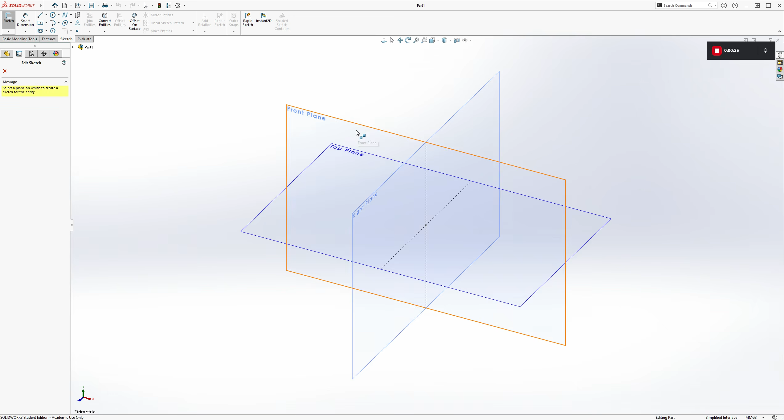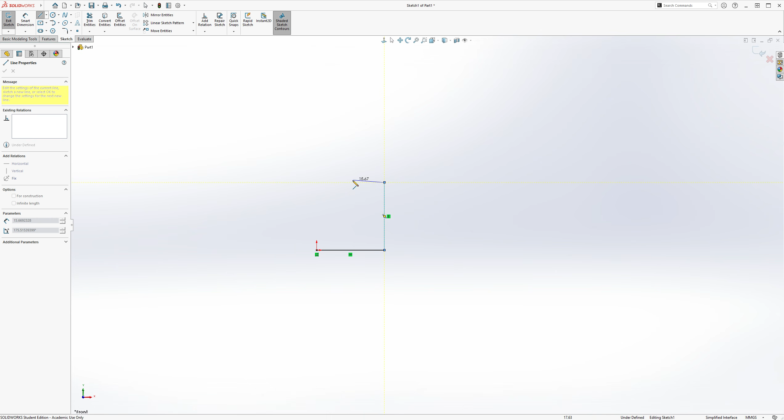So the overall diameter of the entire part is going to be 50. I'm just going to draw a horizontal line stretching across like this, and draw a line up like this. First we'll start with this as our overall extrude, and then I'll create some more rectangles in here to make the revolve cut.

First let's make sure the overall diameter is correct, oh actually I forgot the most important thing, which is the axis of revolution. Here's your center line, right here.

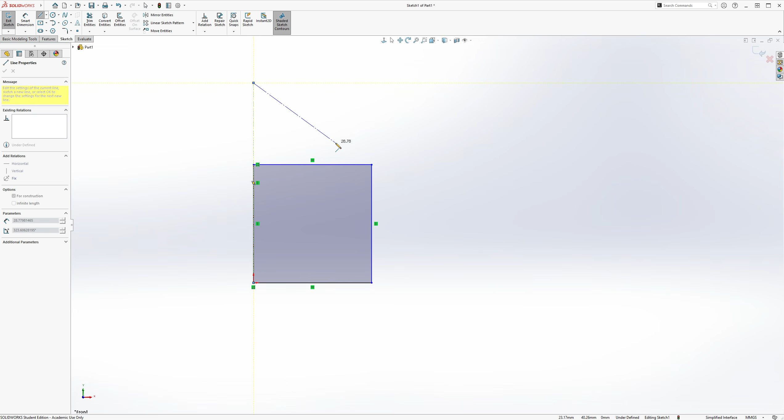Okay, so let's first establish the overall diameter. It's not 50, it's actually 55. The overall diameter is 55. So I'm going to click on the right side, click on the center line, hold and pull down. The whole total diameter is 55, so I will establish it as that.

And the height of this initial revolve, if you look in the front view, it's actually not 30, it's 24. The distance from those pizza slice cut extrusions at the top to the cylindrical extrusion is 6, and you get that from detail view B. So you subtract 6 from 30, and you're left with 24. So the cylindrical part is 24 tall, so that's what we're going to dimension this as.

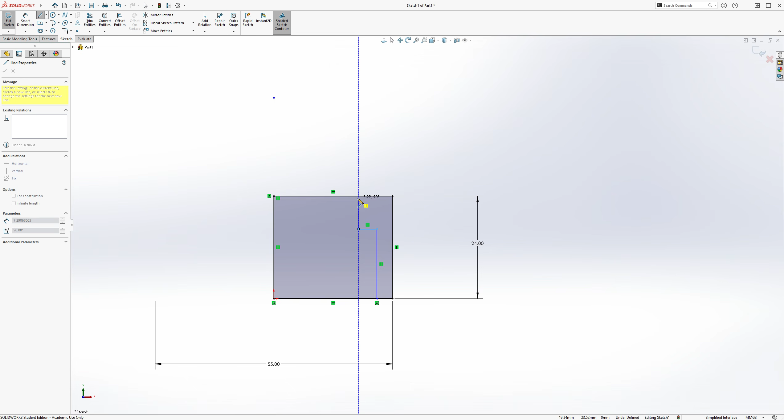So there's your base cylinder, but then we're going to add some cuts. I'm going to add a line here, go in a little bit, and go back up like this. So that's going to be your interior cuts.

The first cut layer has a diameter of 47. So I'm going to click on this line, click on the center line, hold, pull it down, and establish that cut diameter as 47. I'm going to do a similar thing with the other line.

The center hole's diameter is 30, and you get that from the top view, 30 in diameter. So I'm going to click on this line, hold the center line, pull down, and make sure that diameter is 30.

And then now I need to find the distance between them. Let me see. The distance between them... wait, actually that's weird. What is the distance between them? Would it be 6? No, it wouldn't. Oh, I see. Ah, I see. Okay.

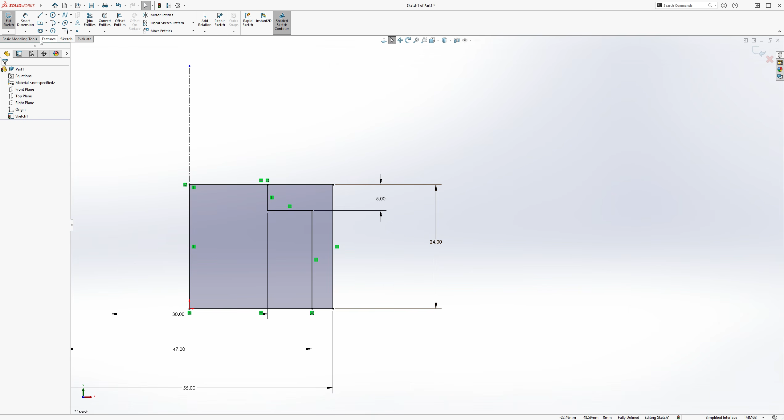From here we can do the revolve. So I'm going to click Feature, Revolve Boss Base, and the center line is already selected as the revolution axis. So I'm going to only select this contour, since this contour represents what's going to be revolve cut inside. So I'm going to select that.

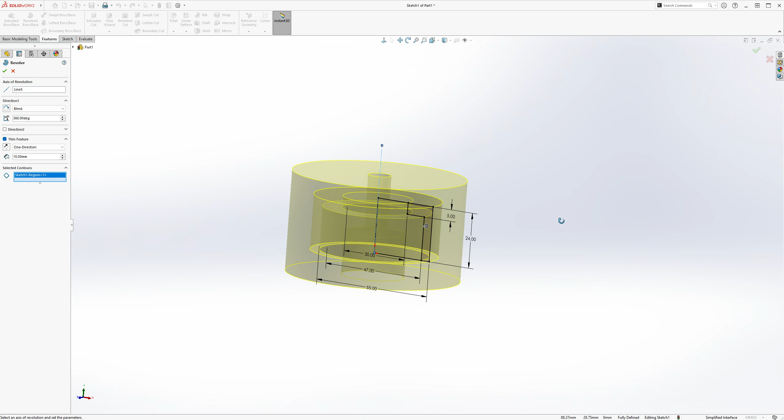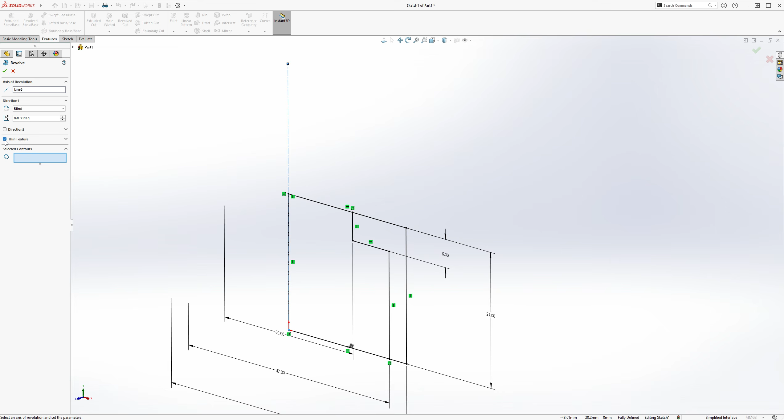Ooh, actually, wait, hold on. Wait, if I click Revolve Boss Base, wait, Thin Feature, why is Thin Feature turned on? I do not want Thin Feature turned on, I just want to revolve this. Yes, it should look like this. Yeah, it automatically set Thin Feature to be turned on for some reason, not sure why. But anyway, it should look like this. As you can see, it's hollow on the inside, two different layers, so that's good.

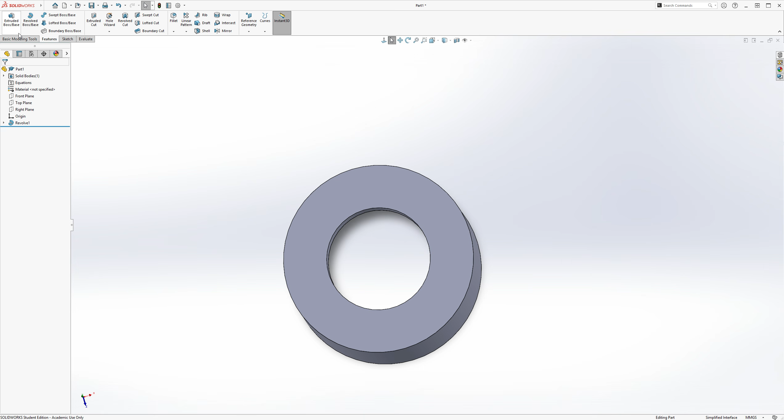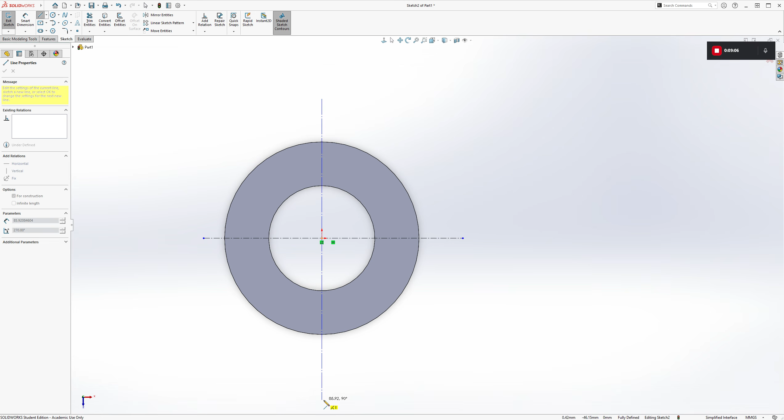Okay, so now we can go on to make our pizza slices. So let's click Sketch and let's click the top face. And then let's create a center line here. So actually, let's create 2 center lines, because I want the circles to be vertically constrained with the origin.

So I'm going to create a circle here, just a random circle. I'll actually create a concentric pair, like this. And then I'm going to mirror these 2 circles onto the other side, like so.

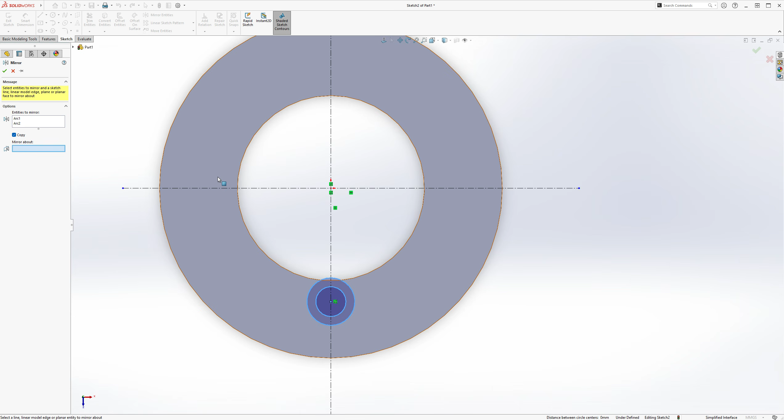Now the first constraint is that the distance between those 2 centers of these symmetric circles is going to be 37, so that's where we'll start. And we know that the diameter of the inner circle is going to be 5.

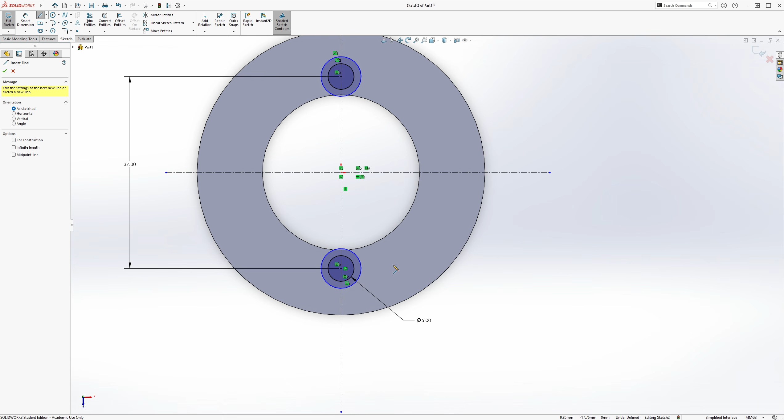Now let's add a line that's connected to the outer circle, coincident with the, I guess we'll just call it a donut, coincident with the donut extrusion. And then I'm going to mirror this line, this tangent line, onto the opposite side to get some symmetry.

And then I'm going to add an angle dimension between those two lines as being 100 degrees.

And then the last important detail is we need another tangent relation between this inner circle of the donut and this outer circle of the pizza cut. So I'm going to make these tangent. Tangent. And there, everything is fully defined.

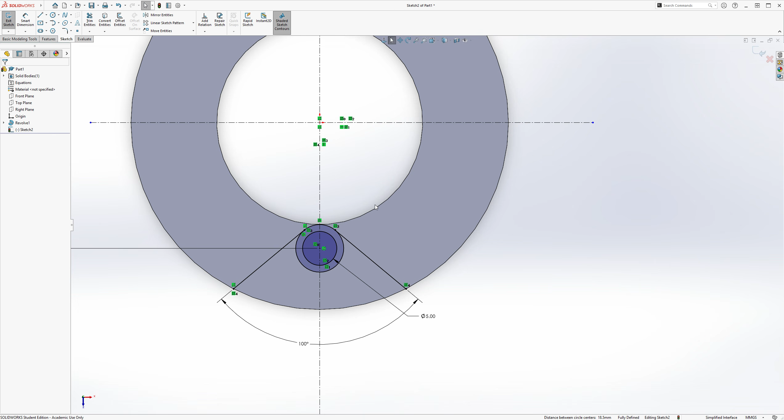Now all you need to do is just mirror these two tangent lines onto the other side. Mirror. So there's your pizza cuts. And you can just trim away the parts that you don't need.

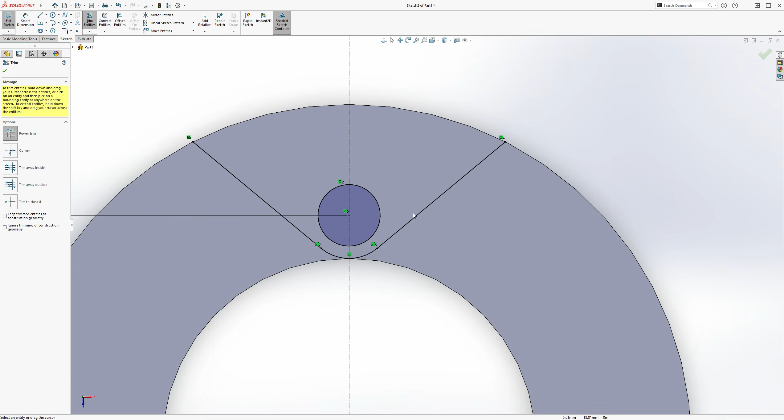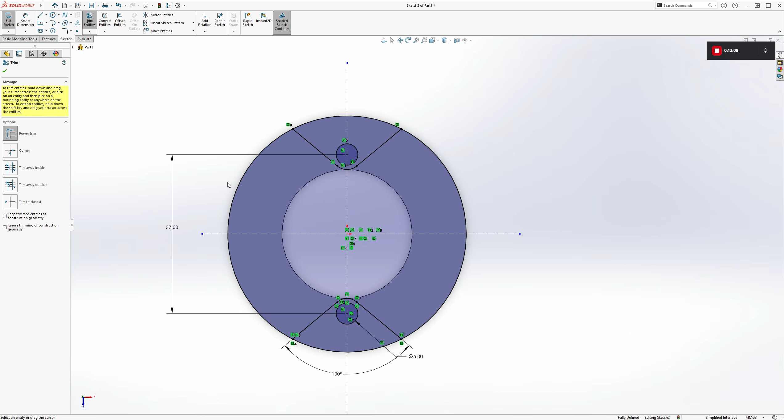But these are not closed contours because these edges aren't filled. So I'll have to use convert entities, and I'll just select the outer circle, convert that, and trim away the parts I don't need, like this. And boom, you have two closed contours and two pizza slices.

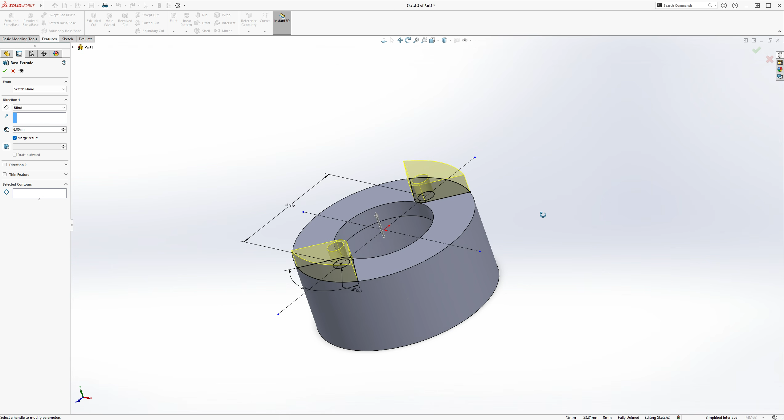So let's extrude those. Feature, Extrude Boss. They will be extruded upwards by 6. Upwards by 6. So select OK.

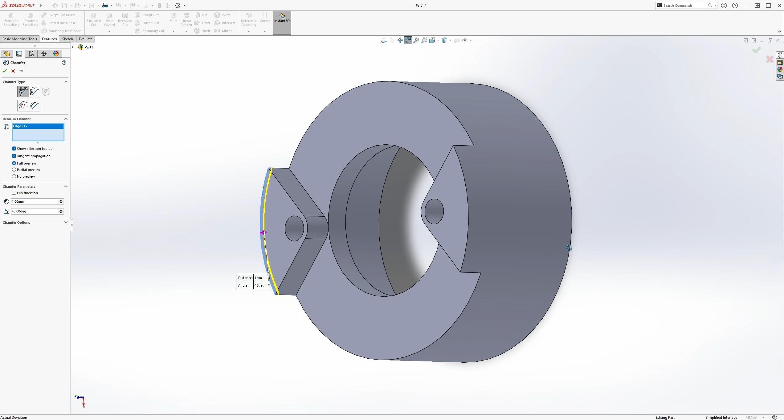Well, now then I believe there's chamfers, yes, there's chamfers on the sides, on the cross side of these pizza slices. So I'm gonna add those chamfers now, before I make this square cut on the side. And the chamfers are 1 millimeter and 45 degrees. So I'll select here, and same for the other side here. Select OK.

Okay, so time for the square cuts. I am going to start a sketch on top of one of the pizza slices. And I'm just going to draw a line connecting from, that connects both, that's coincident with the arc on both endpoints.

And I can move this line like this. So naturally, because we're on a circle, or on an arc, both points are going to be coincident with each other, and both points are going to be symmetric.

And the width dimension of this square cut is going to be 10, so I'll make this 10.

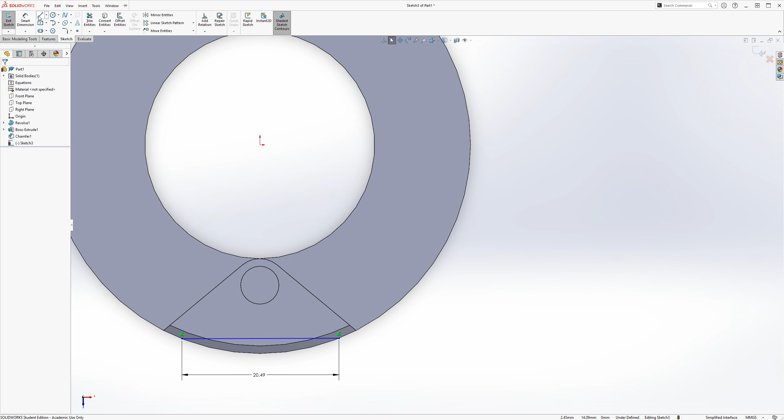Never mind, I guess the points are not symmetric, so let me make them symmetric. I'll take the vertical center line, control click the point, control click the center line, control click the other point, and make those symmetric. So now when I make this 10, it should be symmetric. Yes, okay, there we go.

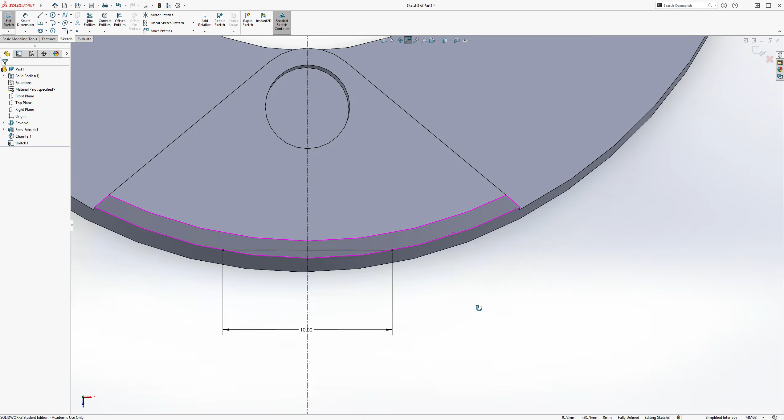And from here, we're going to proceed with the cuts. So I'm going to go to Features, Extrude Cut. Here, since we don't have a closed contour, you can actually use the Thin feature, which allows you to essentially extend this line a certain distance in this direction, and then extrude it a depth downwards.

I can keep it extruding in this side direction as 10, and then I can keep it cutting downwards. It will only cut downwards a depth of 12, so I'm going to click 12. See how it changes the downward depth cut.

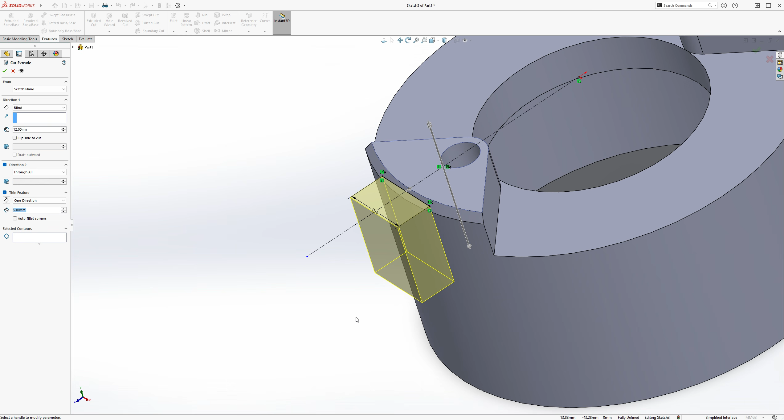But then if I were to change the square, if I were to change it to like 5, for example, it would make it a little thinner. It's basically just moving this line that I've created here, and dragging it across the side like this, and it's finishing the rectangle. By the way, it's the same, so I'm going to click OK. There's your square cuts right there.

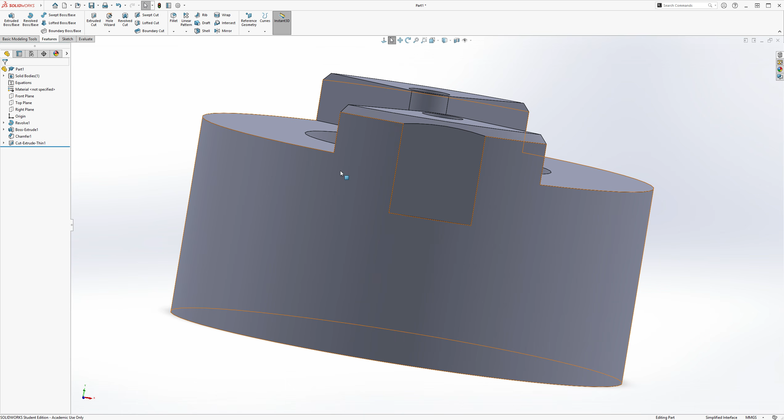And then I'm going to... there's supposed to be a circle here. Let's see. From what I'm seeing, the circle... oh no, there actually is a specific dimension. Oh, I see, hold on.

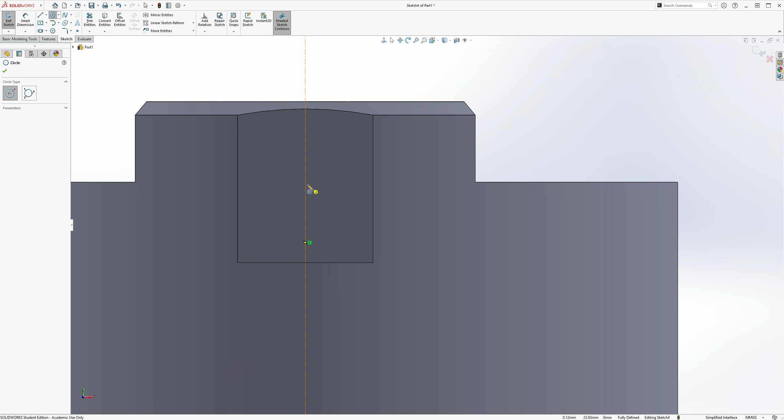I'm going to click a sketch, on the square. Let's get our center line, make it vertical like this. Let's get a circle, and make sure its diameter is 4.

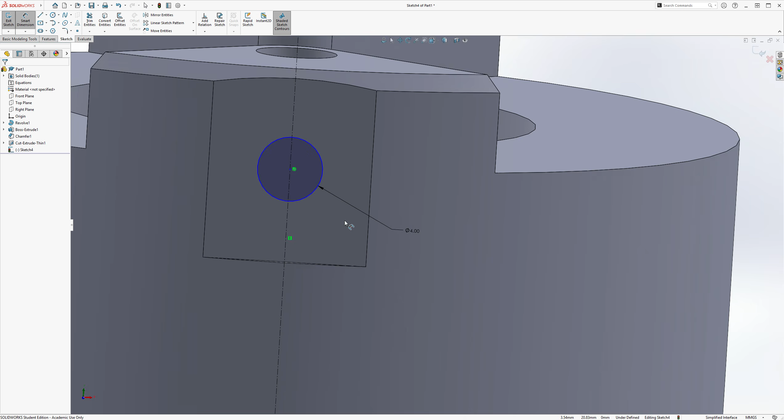And then, if you look closely at detail view B, you'll see that the axis this hole is going to be revolved around is a distance from the bottom of this square cut of 5, which would be the equivalent of saying the distance from center to the bottom of the square is 5. So there's your fully defined hole.

Well, obviously you still need to make the cut, so I'm going to go Features, Extrude Cut. And what depth is the hole going to be cut? The hole is going to be cut a depth of 5, so blind cut, 5 deep. Select OK.

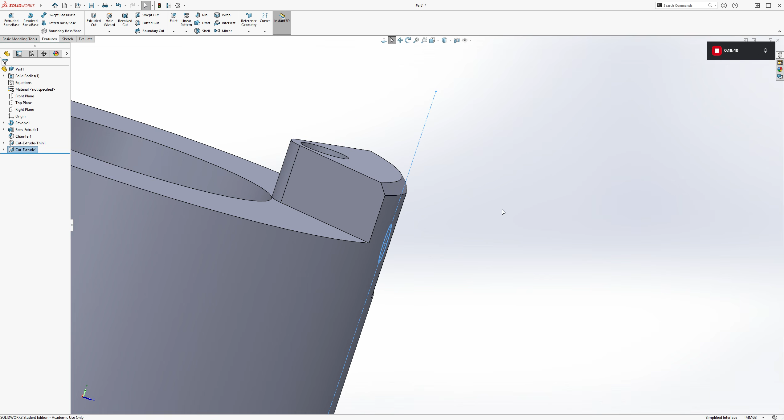And then I'm going to enable my mirrors, or my planes. I'm just going to mirror this square cut that we made and the hole that we made, so both of those cuts are going to be mirrored onto the other side. Let's go to Linear Pattern, Mirror. Our mirror plane will be the front plane, and our features to mirror, if I open up my tree, will be this square cut and then the hole cut. See, it mirrors on the other side, click OK.

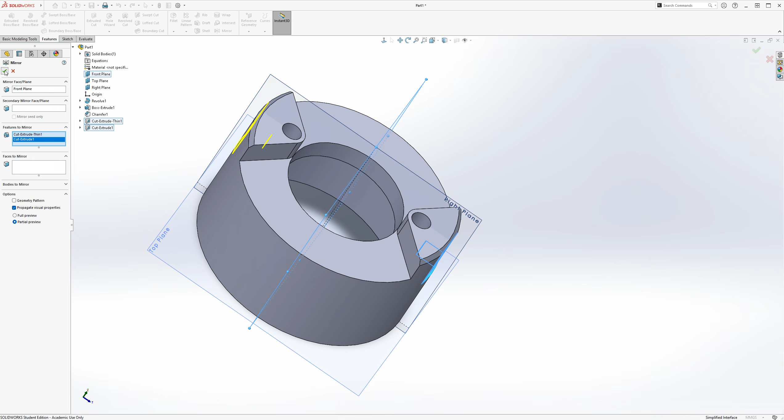And see, it's the same exact thing on the other side. Turn off my planes for now. We're just about finished.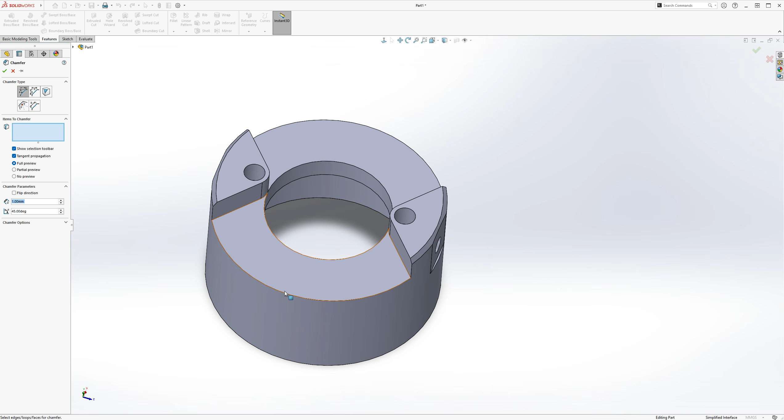Yes, the only thing we need to do is get our chamfers. Finish with our chamfers, so I'm going to go chamfers, 1 millimeter, 45 degrees. And it's around this edge, this edge, and then the bottom edge. Select OK. And then we already did the pizza crust chamfers already.

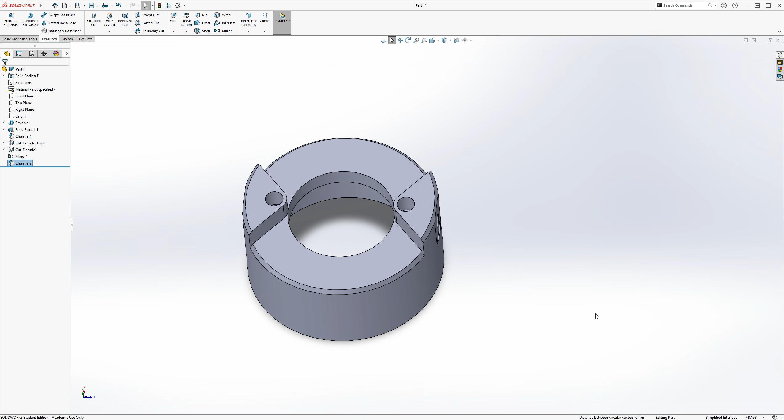And let's check our answer. So I'm going to evaluate mass properties, and for my volume I am getting 22,104 cubic millimeters. Again, 22,104 cubic millimeters. So I hope you learned something from this video, and I'll see you in the next one.